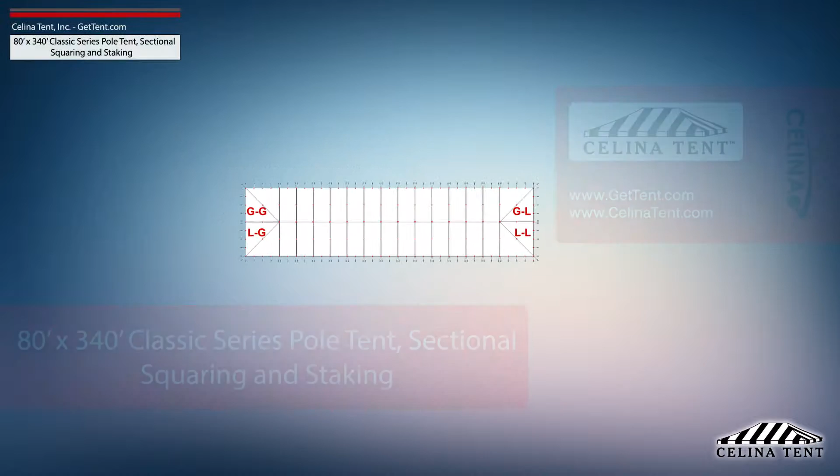This video covers squaring and 5-foot staking applicable to a sectional 80-foot by 340-foot Classic Series pole tent from Celina Tent. 5-foot staking is standard for tents with an eave height of 7 or 8 feet, and would need to be adjusted for eave heights other than this standard.

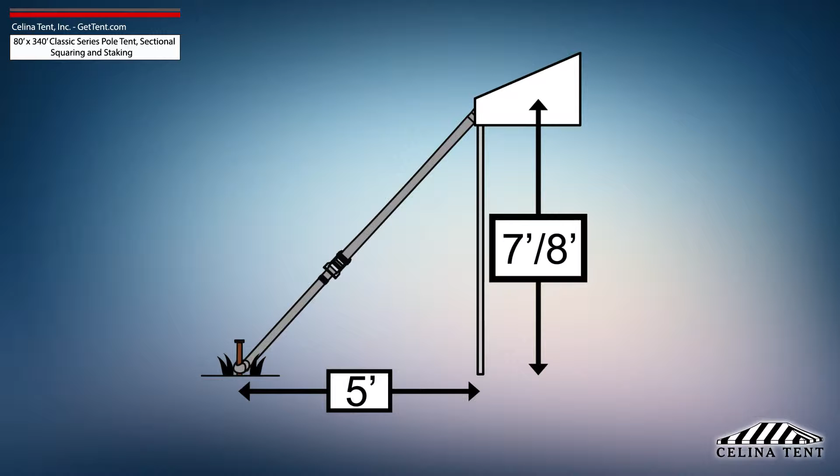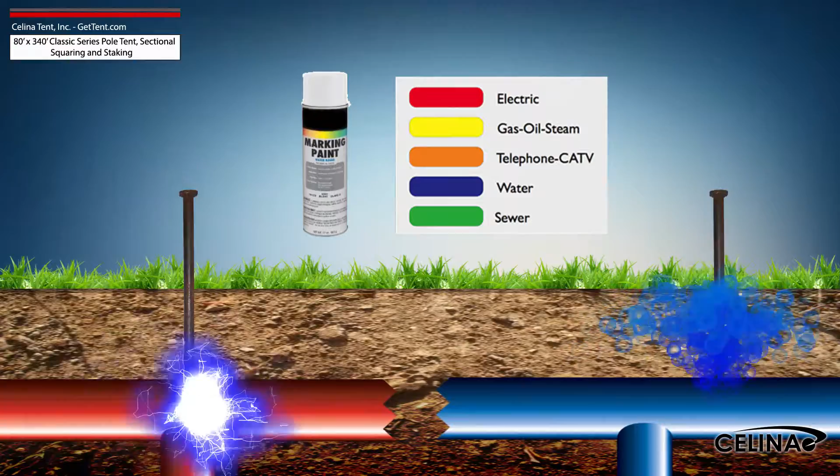Tent squaring allows the installer to accurately place all tent hardware and install tent stakes prior to beginning setup, and helps them avoid any marked underground utilities. Utilities must be marked by your state's local utility services prior to any tent installation.

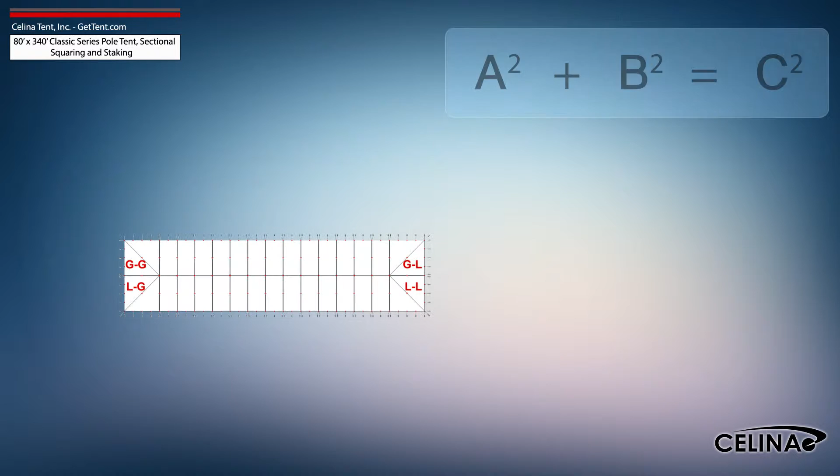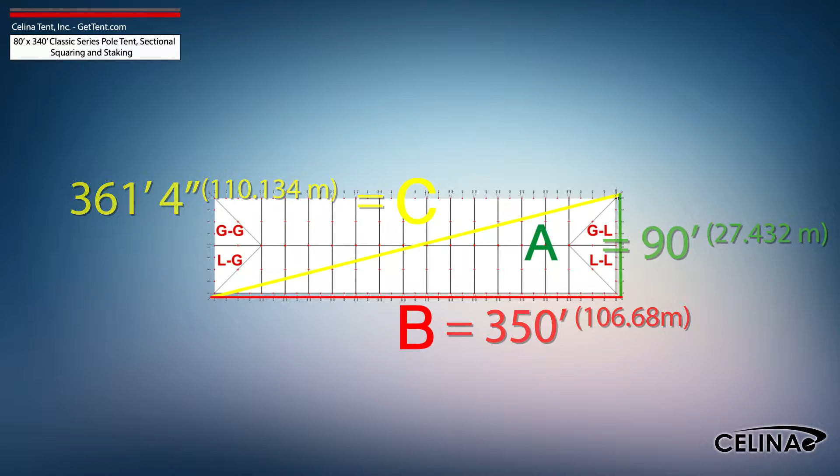Using the Pythagorean theorem and adjusting out for 5-foot staking, the entire tent footprint will be 90 foot by 350 foot, with a 361 foot 4-inch diagonal length. Celina recommends that an 80 foot by 340 foot Classic Series pole tent receives a minimum of 306 stakes.

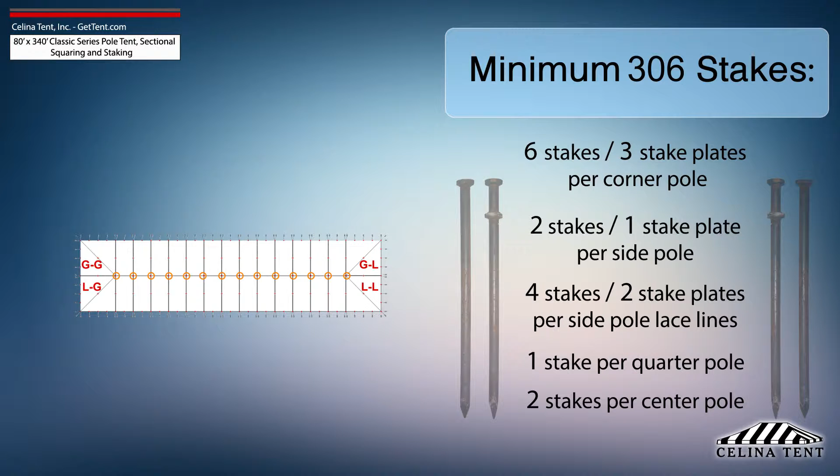6 stakes and 3 stake plates for each corner pole. 2 stakes and 1 stake plate for each side pole. 4 stakes and 2 stake plates for each side pole at laceline locations. 1 stake for each quarter pole. And 2 stakes for each center pole. This amount of stakes provides the minimum amount of security for a pole tent of this size. Additional staking is required for any site that doesn't meet optimal soil conditions.

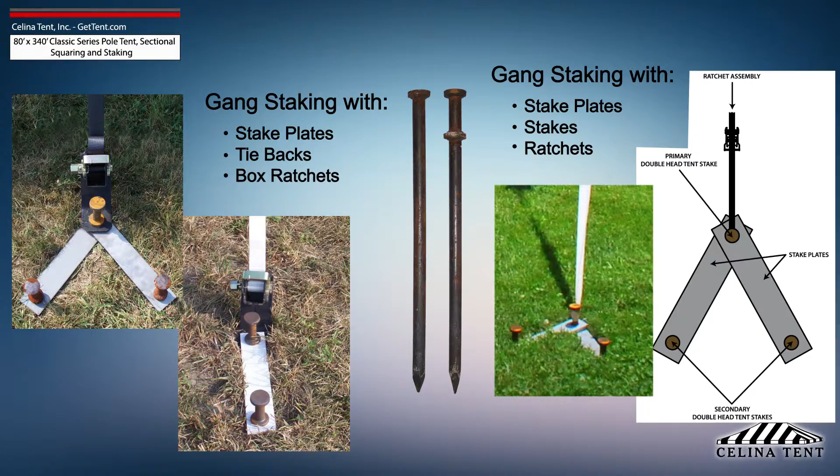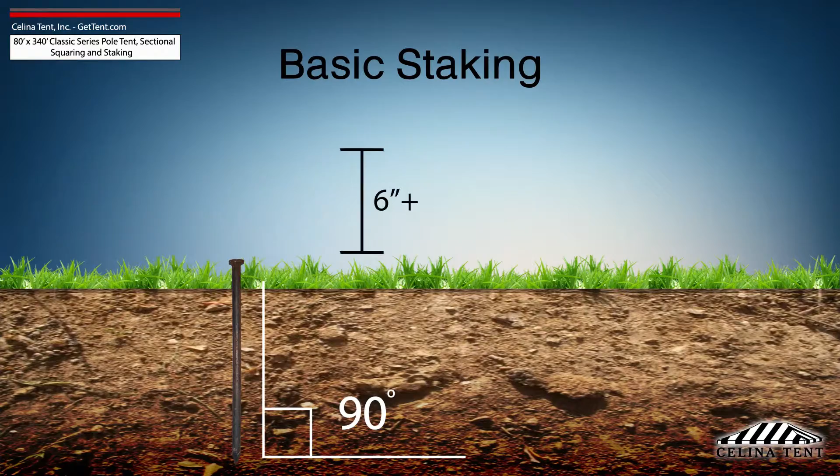Tent staking is the most important safety procedure during tent installation. Tent stakes should be driven vertically so that the stake is as close to the ground as possible with space to tie on a strap. Any length of stake protruding from the ground that is more than 6 inches will have detrimental effects on the holding power of the stake. Attach the ratchet strap or rope as close to the ground as possible to reduce strain on the stake.

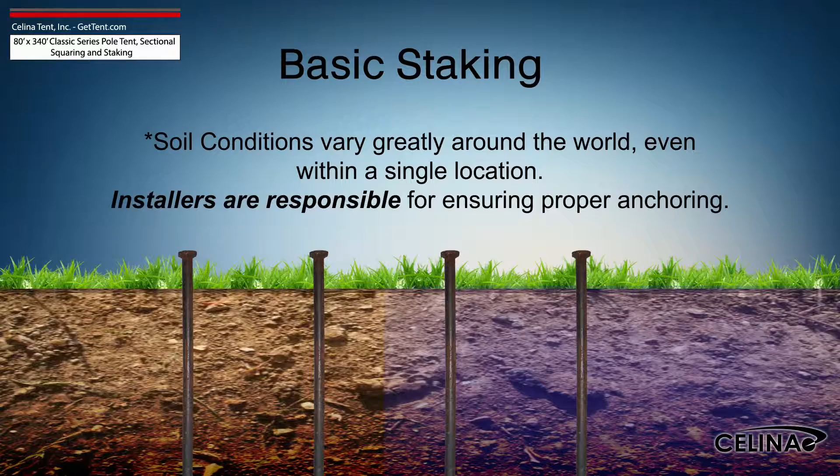It is the installer's duty to inspect the soil conditions and possible weather effects for the duration of the tent installation. For water-saturated or loose soil, more tent stakes are required to achieve adequate anchoring. Staking may be increased using dual stakes and a staking plate, or gang staking utilizing 2 staking plates and 3 stakes.